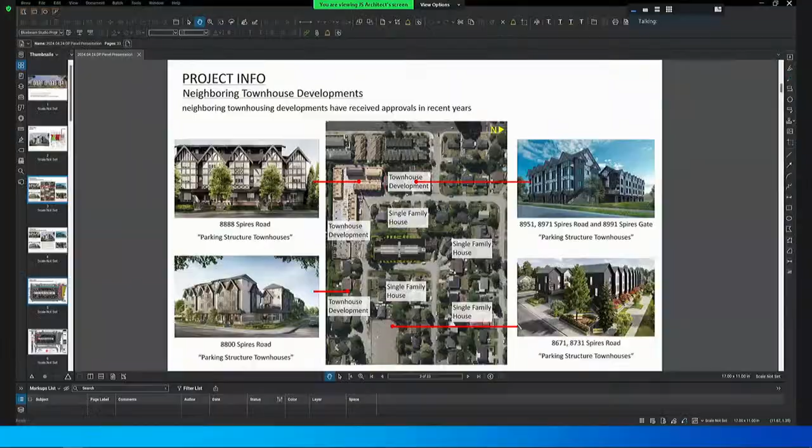Anybody from Topstream here? Yes, my name is Kobe, and our team includes Jeff, the architect, and Ewan, the landscape architect. Jeff and Ewan will do the presentation. Okay, can I start now? It's Jeff from JS Architect. Okay, are you going to share your screen with the drawings? Yes. Can you see my screen? Yes, thank you, okay.

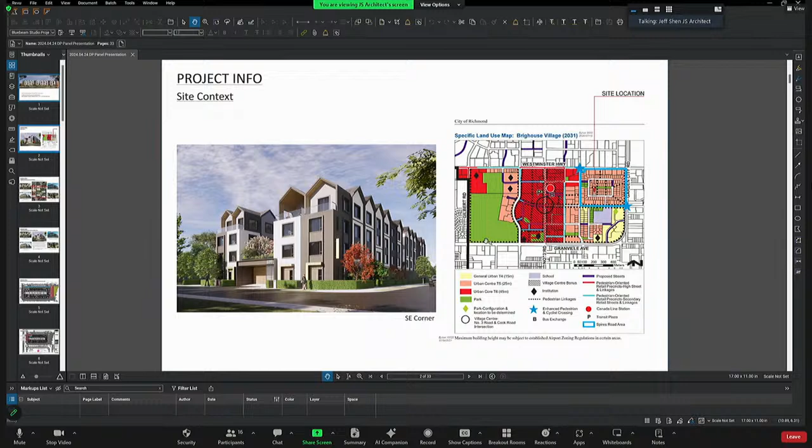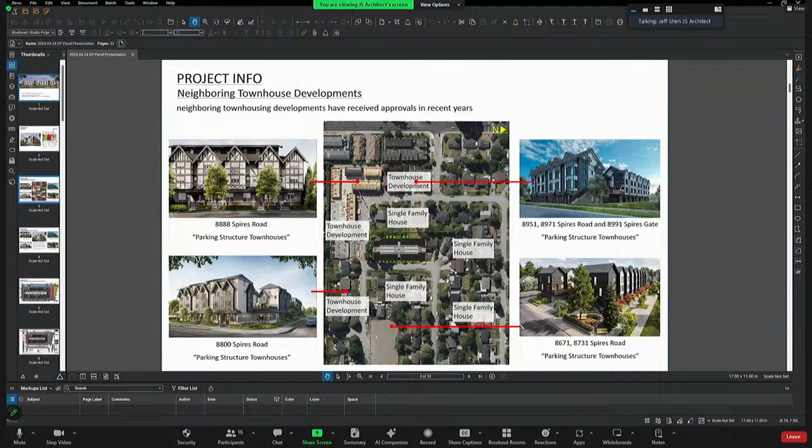Let me start from this first page. Thank you, panel members, for the opportunity to present this townhouse development. The proposed townhouse project is located at 8635 to 8695 Cook Crescent, the Spires Road area in the northeast portion of Brighouse Village in the city center. The subject site is assembled from 4 existing single house lots, bordered by single house and townhouse developments. There are multiple townhouse developments that have been completed or received approval in recent years. Looking at the surrounding townhouse developments, they are articulated in traditional or contemporary expression, or a style in between. There are many common features easily identified among them, such as gable roofs, similar scale of architectural forms, special treatment at ground level, and similar material and proportion across building segments. The proposed development gives a nod to its neighborhood and yet has its own unique character. We will explore it from the site context, floor plan functionality, building articulation, and landscape integration.

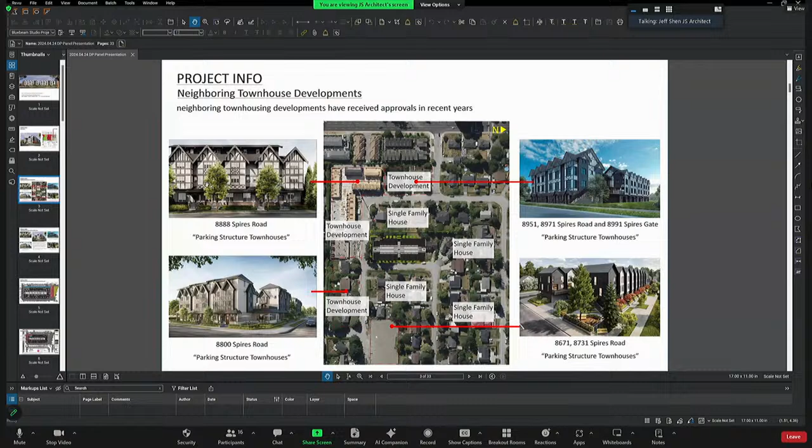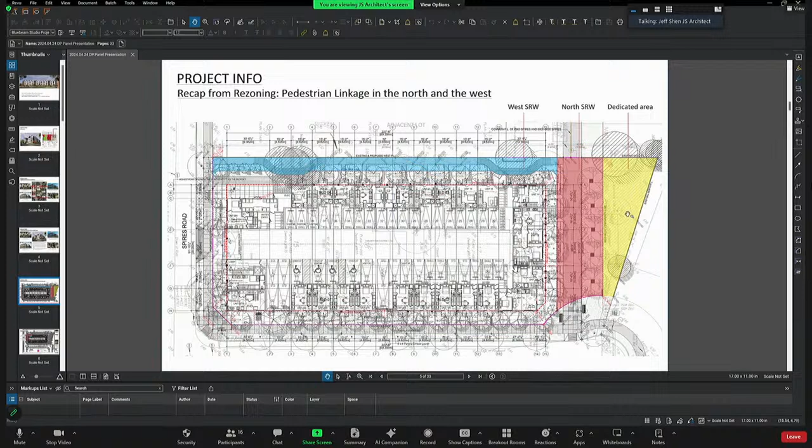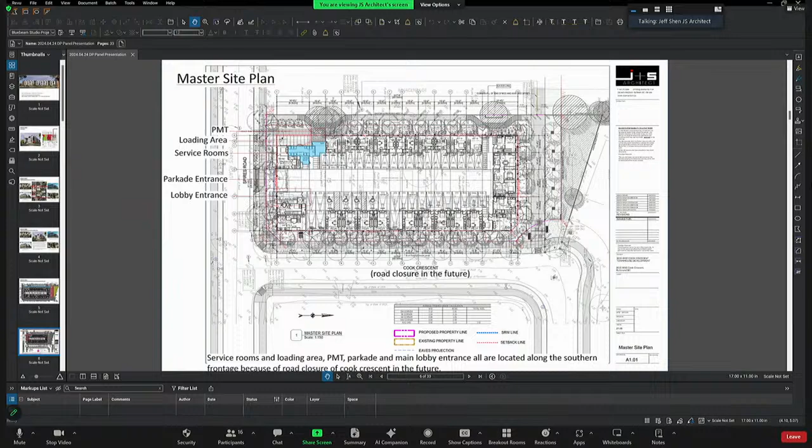The subject lot is defined by multiple rights-of-way on the north and west sides, and there's an odd triangle area to the north which the developer has dedicated to the city for future parkland use. In the city's future plan, the existing Cook Crescent will be closed and become a pedestrian connection to the northern city area. The only accessible road will be Spires Road, and all service facilities, parking, and the main entrance will be located at this very narrow street frontage. This challenge has been carefully studied and resolved by organizing different function areas strategically. The service area has been located at the west corner, visually screened off from the neighborhood property by existing and proposed landscape trees. The parking entrance is placed in the middle of the building with a large recessed area to allow sufficient traffic buffer to Spires Road. The main entrance lobby sits beside the recessed area with full height glazing facing west to monitor vehicle traffic within the residence site.

The development is comprised of a total of 28 suites with a wide variety of unit types from 2-bedroom to 5-bedroom. 50% of the units include a secondary suite for rental, with a total potential of 42 livable suites. The proposed development makes a diligent contribution by responding to the current nationwide housing crisis.

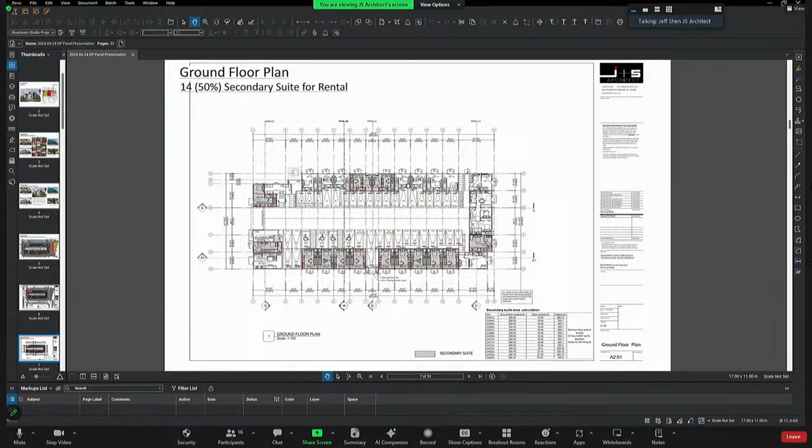As mentioned, the subject lot is surrounded by multiple right-of-ways along the north and west property lines. This area has been designed as landscape pedestrian connections. In addition, there are more than 3 meters landscape strip around the building perimeters to provide a second layer of green space, or allow for private patio amenity between the sidewalk and the individual unit entrance.

The live planted area are clearly identified in this page. It occupies 29.4% of the gross site area. Approximately 80% is located at the ground floor, and the rest of the green space are distributed at the parking roof and the podium level. Our landscape architect will provide more details introduction regarding the landscape design.

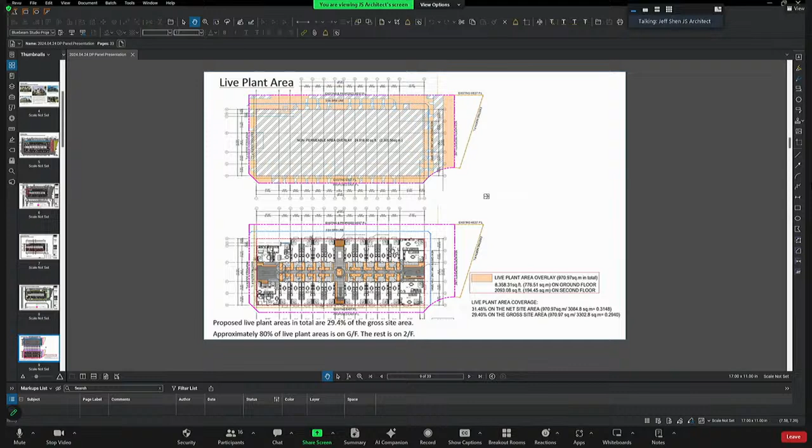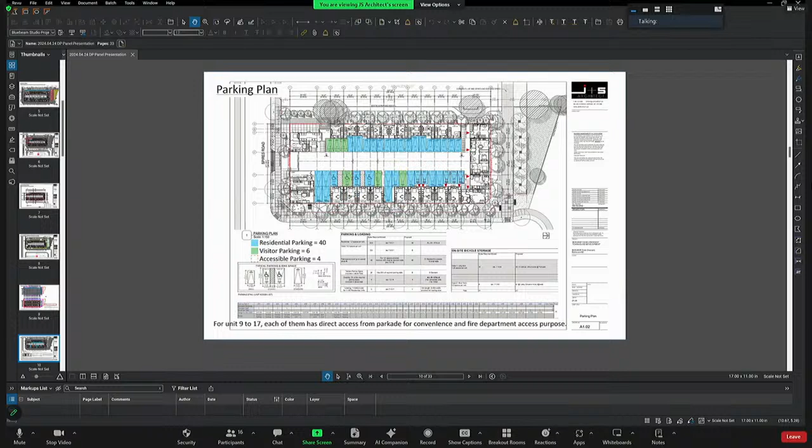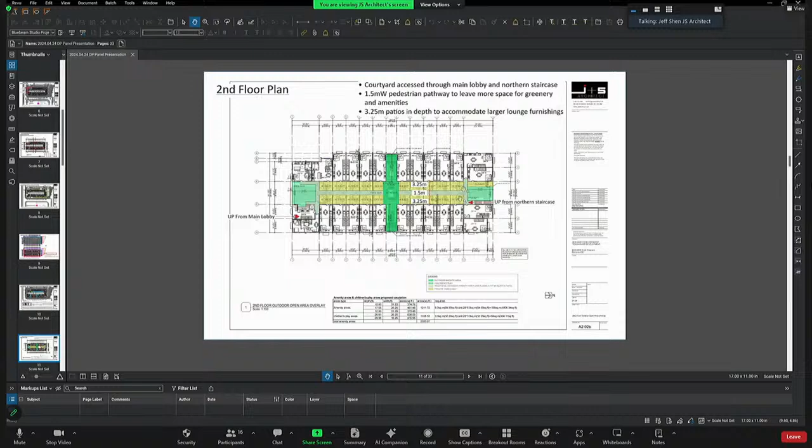The large courtyard is accessible through the main lobby and also from the north side staircase. Children play areas are located at the south and north ends with maximum sunlight exposure. Common amenity is in the middle. Over 3 meters private patio is provided to most of the units at this level. There is plenty of green space provided at each side of the building which can be shared by ground and upper-level units. And again, I will pass this opportunity to our landscape architect for detailed introduction.

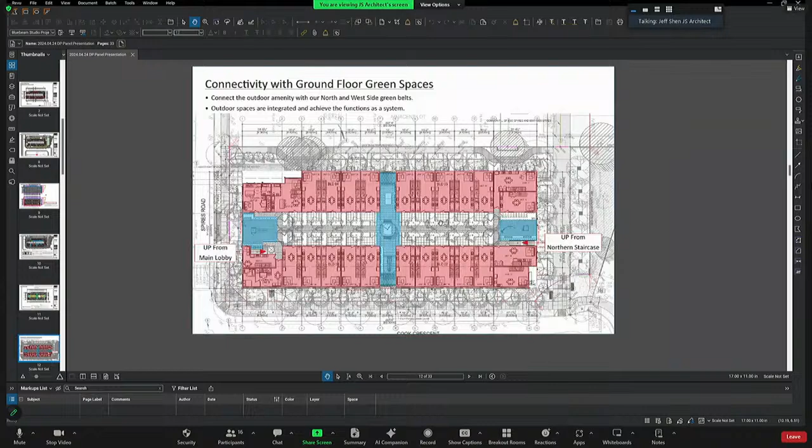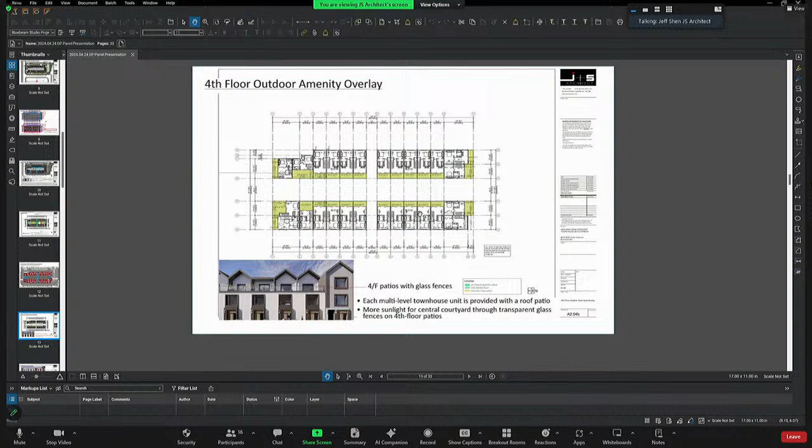The architectural expression focuses on a wide variety of materiality, texture, and color to create a vibrant streetscape. This concept is consistent at all building elevations, yet with some variances, by using different materials on the ground floor to visually reduce the height of the building and create a human scale entrance for each unit at ground level, breaking up building mass using high contrast materials.

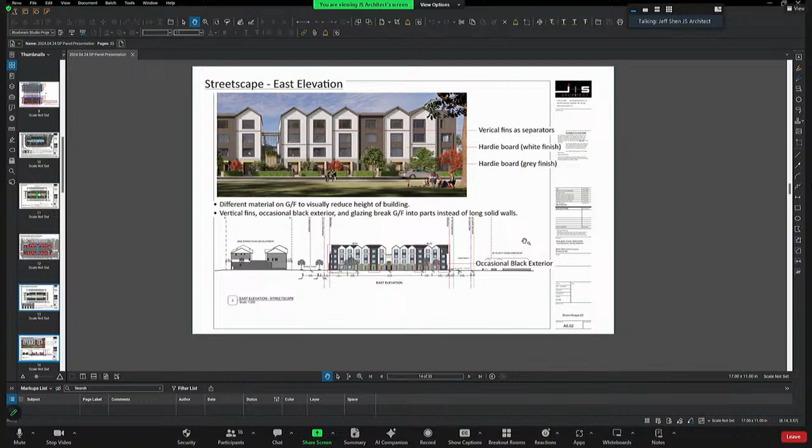The elevation presents a smaller scale to respect the cross street single house building style.

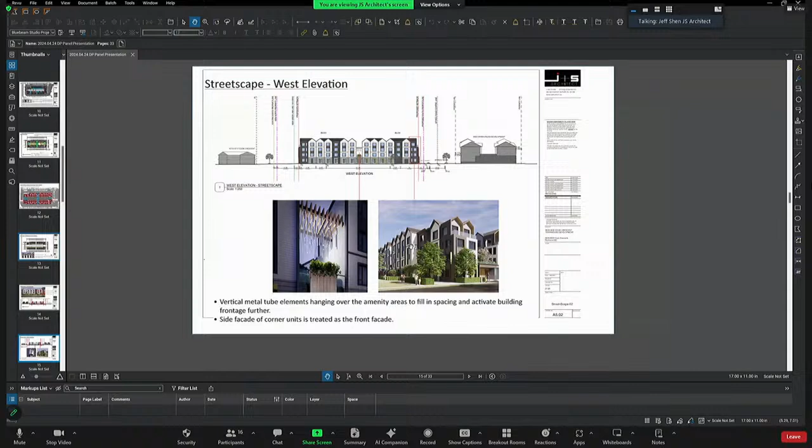Architectural articulation continues around the corner unit, using the same material and treatment to carry the front facade and treatment to the full elevation at the same street frontage. This page shows how each side of the building is treated as equally important, all having consistent visual interest.

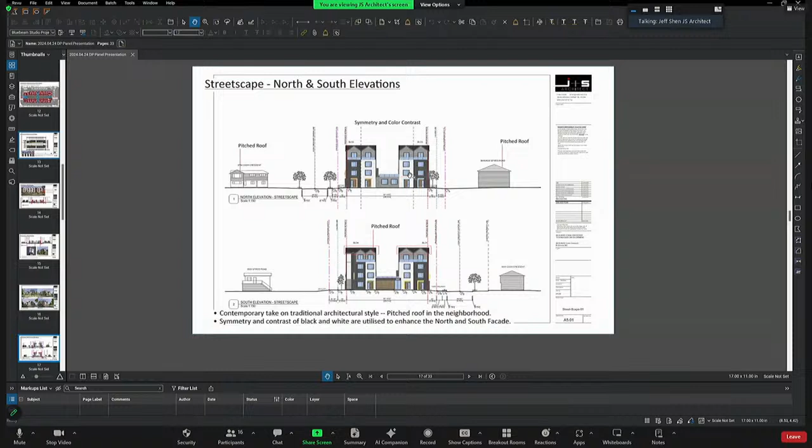Different colors of material have been selected to provide individuality to each block. 4 different colors have been assigned to 4 building blocks with different meanings. Yellow means sun, orange means land, blue represents water, and green is life. The design provides unique identity to each block and creates easy way-finding, iconic for residents as well as all visitors.

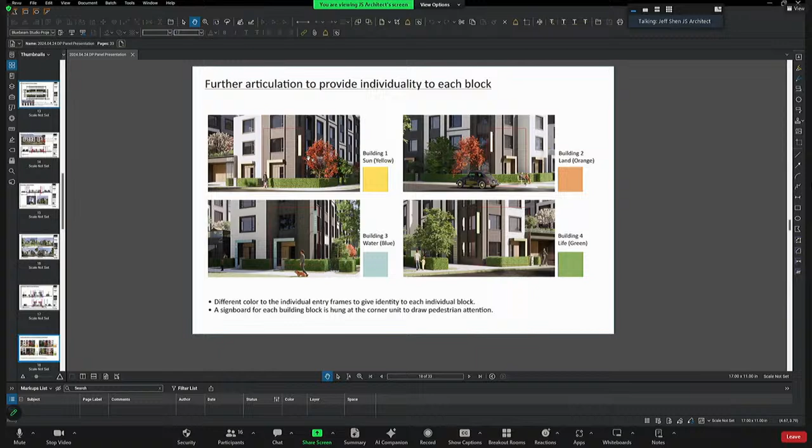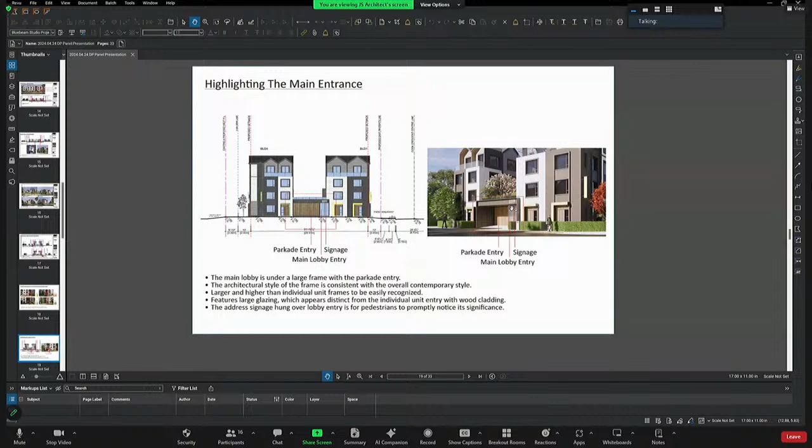Stable, secure, durable, and high-quality materials are selected for the project, including Hardie cement board, low-E glass, metal guardrail, and natural walnut panels.

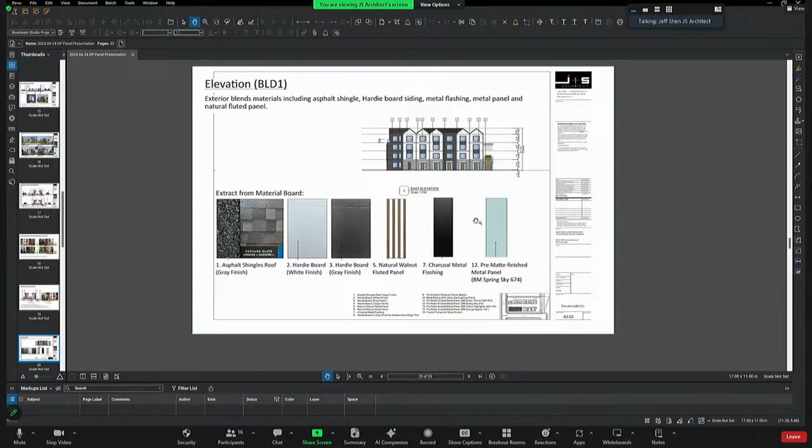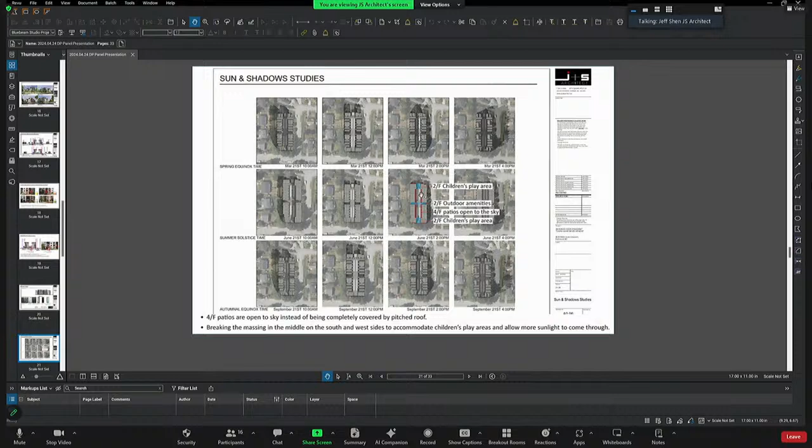This shadow study shows the proposed building has no negative shadow impact to neighbors, especially in summertime. And also we can see the children's playground area is exposed to the maximum sunlight direction.

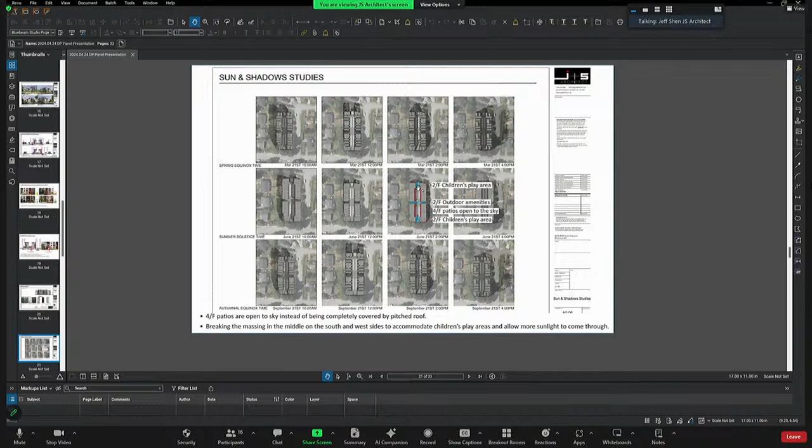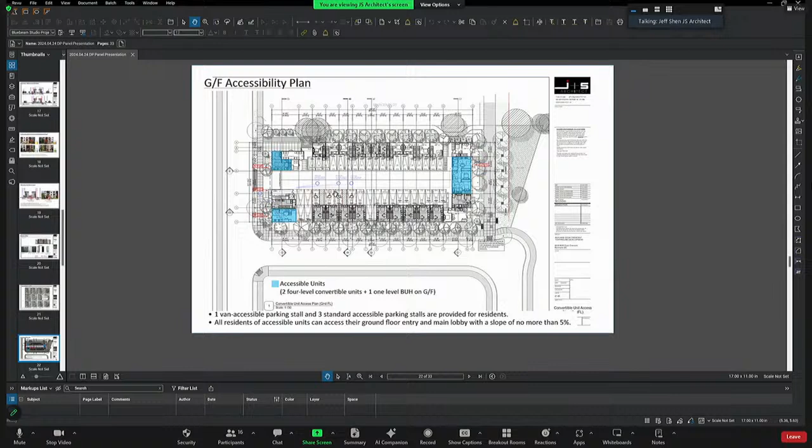Accessibility has also been prudently considered, including 3 convertible units, 1 van access stall, and 3 standard access parking stalls. Upper units can also be accessed from the elevator within the lobby area.

Regarding sustainable strategy, the proposed building will be in compliance with Building Energy Step Code, Step 4 target. And of course, we will be in compliance with the recently published BCBC Building Code 2024.

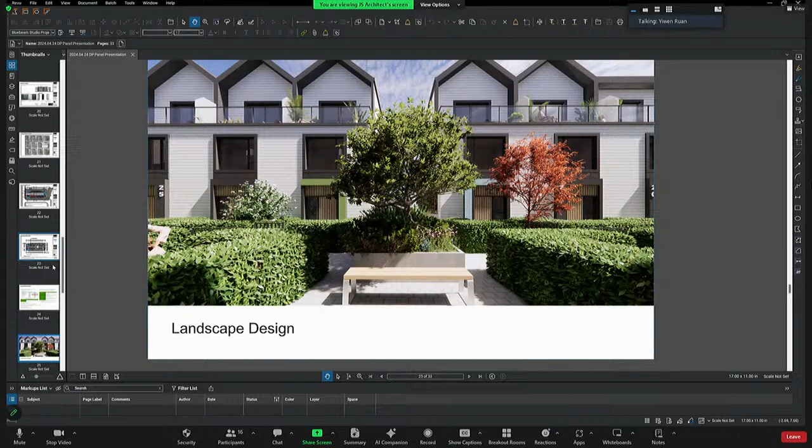So Yiwen, please. Thanks, Jeff. Hi everyone, my name is Yiwen from PMG Landscape Architects. I will give a brief introduction about the landscape. Can you go to the next page, please, Jeff?

Okay, so this is the overall ground floor landscape plan. Along the 4 edges, we are proposing a large landscape at the yard. Each unit yard will have a minimum of 1 canopy tree, which also enhances the walking experience around the site. We are trying to retain the existing trees along the west edge, the upper side of this plan; the pathway and associated landscape will be installed around the tree protection zones. Also along this edge, a solid fence is proposed to ensure site privacy.

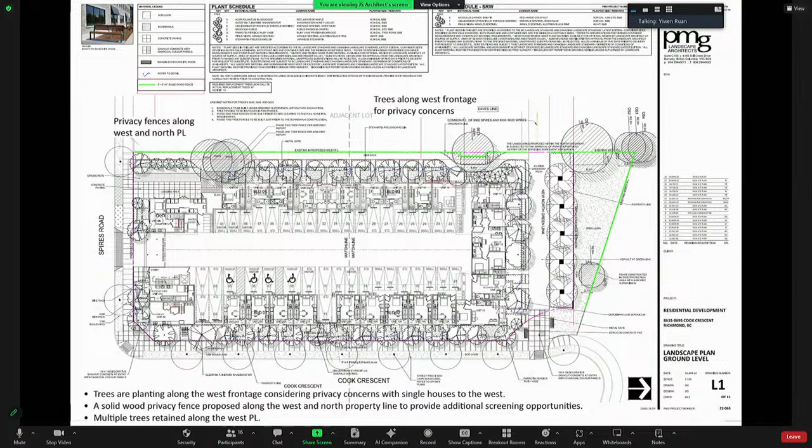Next page, please, Jeff. Yeah, okay, sorry.

We also have two open corner plazas at the northeast and southeast corners. Decorated pavers and furniture are proposed in these two plazas, offering people a place to gather and interact with each other. Next page, please.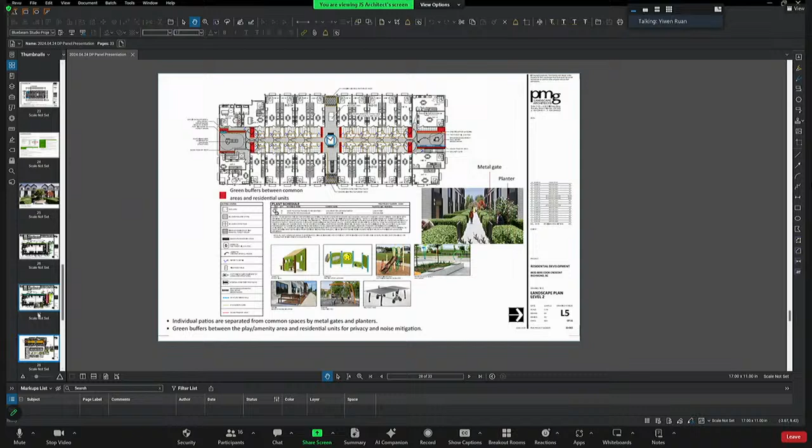On podium level overall, we are proposing more than 2,300 square feet of outdoor amenity area and more than 1,100 square feet of play areas, which is much more than required. Two playgrounds are proposed at the two ends.

The south playground is for kids age 5 to 12, and the north one is for kids age 2 to 5. A variety of play equipment is proposed, ensuring multiple kids can play at the same time. Seating is also provided around the playground for parents to look after the kids. In the center, outdoor fitness equipment and table tennis are proposed for adult use.

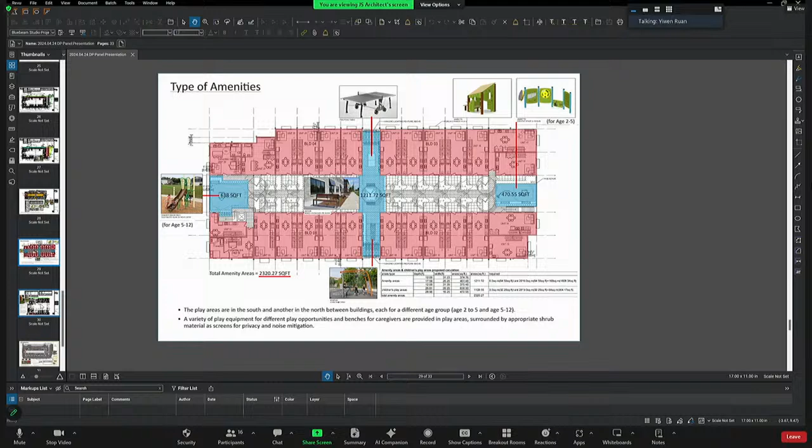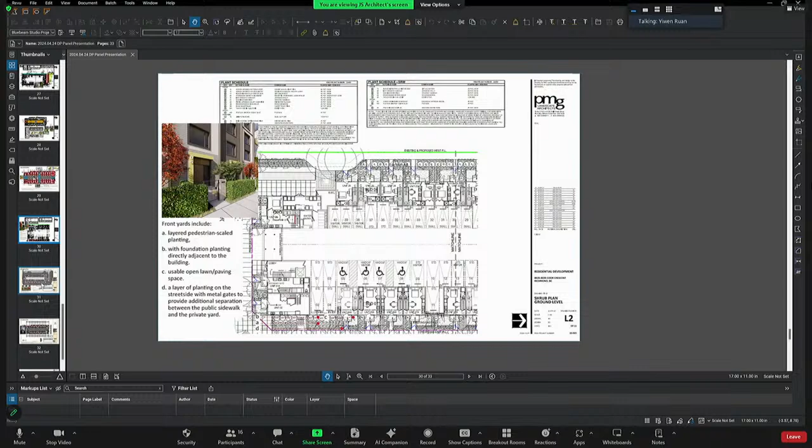Next page, please. In each yard, we have layered pedestrian-scaled planting and foundation planting adjacent to the building. Open lawn area or patio at each yard provides enough space for residents to have programs such as barbecue and table and chairs. Looking at this rendering on the left-hand side, we can see a hedge planting with a metal gate around this yard to ensure yard privacy.

Next page, please. For the lighting overall on the ground level, there are two types proposed. One is wall lighting integrated with the entry column, which not only lights the residence yard entry but also provides enough light for the pathways. The other type is recessed pot lights to light the front door for each unit.

Next page, please. At podium level, there are two architectural features with hanging LED light tubes at these two ends to light the outdoor amenity area. Next page, please.

So overall on the site, each tree we propose will have enough soil volume to ensure its health. The plant selections are primarily drought tolerant material, and we will also be providing high efficiency irrigation for all the planting areas. That's all the presentation for the landscape.

So Jeff, if you have anything you want to add for the presentation. Yeah, we'd like to answer any questions from the panel members. Thank you, we actually will have staff make some comments before giving the panel an opportunity to ask questions.

So, Mr. Craig. Thank you, Madam Chair. Just one point of clarification: the triangular area north of the pedestrian greenway that is being established is not intended to be park. That area is a future development lot. We do expect that there will be a license agreement entered into to allow the residents of this development to use that area until that redevelopment occurs, but it is not a city park.

Further to that, I would indicate that there is a servicing agreement associated with this project for site services and frontage works. I would like to commend the applicant on their efforts to integrate the 4 existing trees on the walkway along the western edge of the site. Happy to answer any questions.

Thank you, Mr. Craig. Maybe one point of clarification - the northern triangular piece of property, you said there will be possibly an agreement to allow residents to use it. Would it be on title or some other means to make sure that in the long term, if the adjacent site doesn't develop for a while, there's no confusion that this is not their property, just to avoid future conflict?

Through the chair, yes. The title of the property will be transferred to the city. The city anticipates entering into a license agreement to allow the residents of this strata to use that lot. That area will be fenced to prohibit public access.

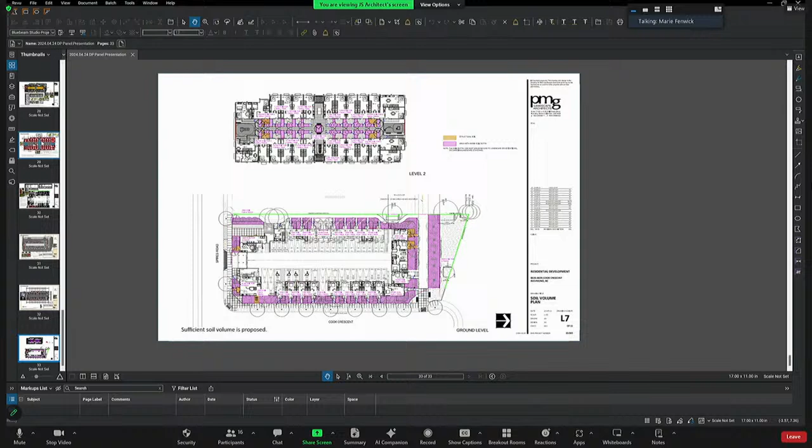Yeah, I had a question about the secondary suites. How big are those units and how many bedrooms? And where is the access relative to the access to the primary unit?

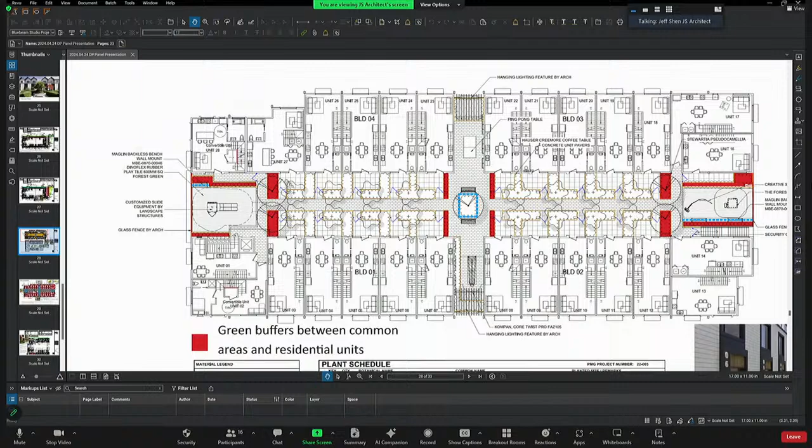Coby maybe can answer these questions. Okay, yeah, I can answer - the secondary suite can be accessed either from the ground level or from the upper levels. It's a little flexible for the big family member who can live in a different level of the suite.

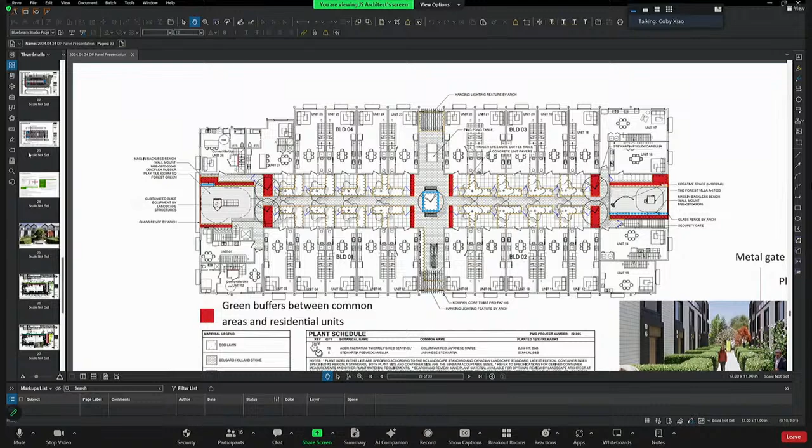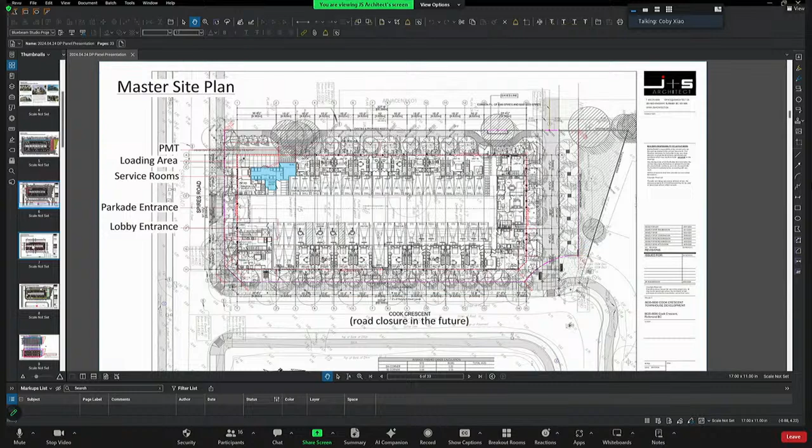If I can add to this, all the secondary suites are accessible from the ground level, from the street or from the right of way. We have indoor stairs connecting the secondary suite with the main suite, but when it's rented, the door between them will be locked. The size of our secondary suite is around 300 square foot, some larger, some closer to this number, and most will be a studio with just the kitchen and bedroom together. Thank you.

Okay. Michael, do you have any questions? You hear me fine? I didn't get a chance to check my mic. My apologies, do you have any questions or comments? Yeah, can you hear me? I'm asking that - yes, we can.

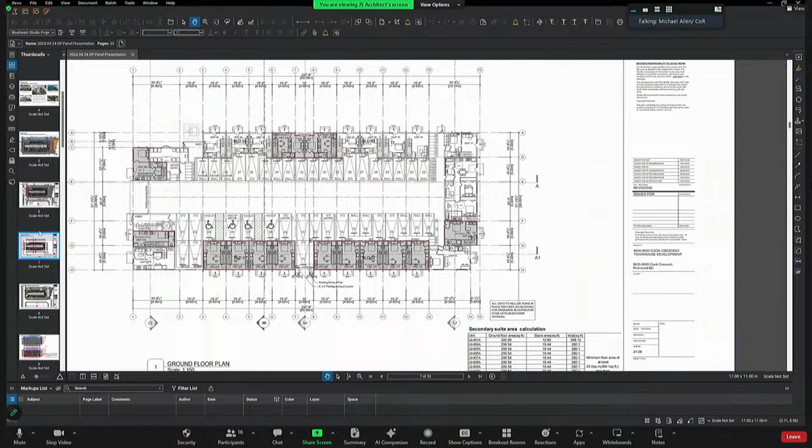Okay perfect, yeah, I was just going to ask you about the tree preservation. It seems like you've actually altered the plans to include the 4 trees to the west. If so, that's very commendable.

And then I just was wondering about the trees in the triangular part - I guess they're just on their own for now, and we'll see if they come out with respect to the license, is that true? Actually, in this triangle area, there's also several trees that need to be preserved, and according to our arborist report, the trees in this triangle and also the 4 trees on the west are all the trees to be preserved.

Okay, does that satisfy your question, Michael? Okay, I'll follow up with a couple of things first - I'm really pleased to hear that the number of bedrooms went from 2 to 5 bedroom types, so a good variety of size to accommodate families and smaller units for younger folks just starting out. I also like that it's matched with a good variety of amenities to meet the active play and passive needs of all ages and abilities.

My question is, you had shown that piece in between the gaps of the building where there's some sculptural pieces hanging down - is that part of public art contribution, or just a design element you've incorporated? No, it's not part of the art contribution, it's actually just our design, trying to make the project all connected between buildings and fill up the gaps. For the art contribution, we don't know what we will get for that yet.

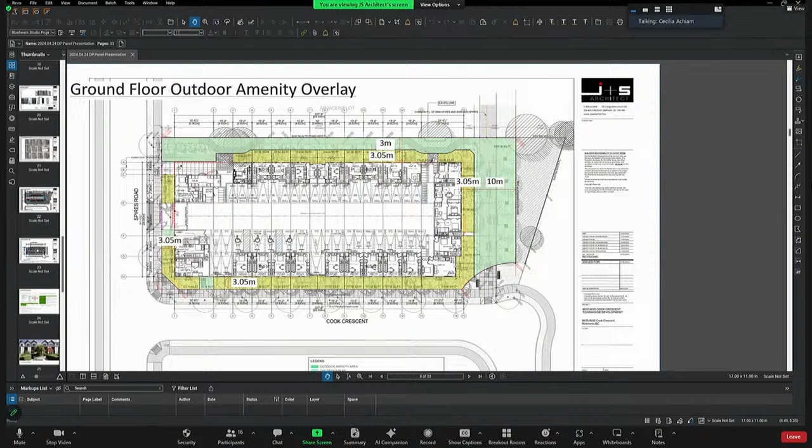The other thing is, I know most of my questions you've answered through your quite thorough presentation. Along the west side and the greenway, the lighting you've shown in the patio space - is that already sufficient for both of those areas to be lit, since they are quite far away from the actual buildings themselves?

For the landscape-wise, we have 2 types of lights. One is on the building, showing recessed pot lights from the porch. Another one is coming from the post - we have the post right on our property line area, shedding some light to the right of way. Okay great, thank you, I think you've answered my question.

So, Mr. Clerk, is there any letters or public in the chamber ready to speak to this project? Thank you, Madam Chair, we didn't receive any correspondence for this item. We have one member of the public in chambers, but she would need a translator to make her comments, and the translator is not yet in chambers. Not yet - are we expecting a translator?

She is expecting a translator, but the translator is not yet in chambers at this time. Okay, and there are no letters currently to be read?

Nothing, Madam Chair. Okay, I would say for the public individual in chamber, first of all, thank you for coming out to speak to the project. Unfortunately, we can't really hold up the proceedings to wait for your translator, and the city doesn't provide translation services.

So if the translator arrives before we finish deliberation on this project, I will make an exception to hear the presentation. Otherwise, if I could suggest doing so in writing and working with staff, if Mr. Craig could take that into advisement to actually have staff meet with the public individual maybe after the meeting.

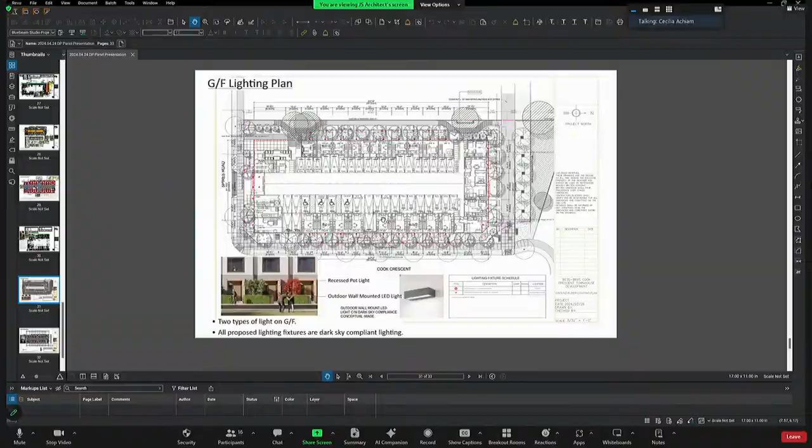Okay, so I guess I'll speak for us. This is a well thought out design. The form and character is quite modern, and as your presentation said, provides a nod to the existing surrounding area. So that's appreciated. A reminder that as the province comes down with new legislation, the interface to the west may look quite different when the future development comes in. But I think with the setback and it being an interface of a walkway, it buffers these new residences a little bit from that development as well. So I don't know whether you guys actually put thought into that ahead of time or whether it's happy coincidence, but either way, it's a good thing.

And so with that, I would like to note that staff has a positive recommendation on this site. And if I could have somebody move an approval for this site.

Move to approve. Okay, and I see Michael seconded. All those in favor? Okay, so thank you. And you have an approval, so you will be going to council as soon as you can. Thank you.

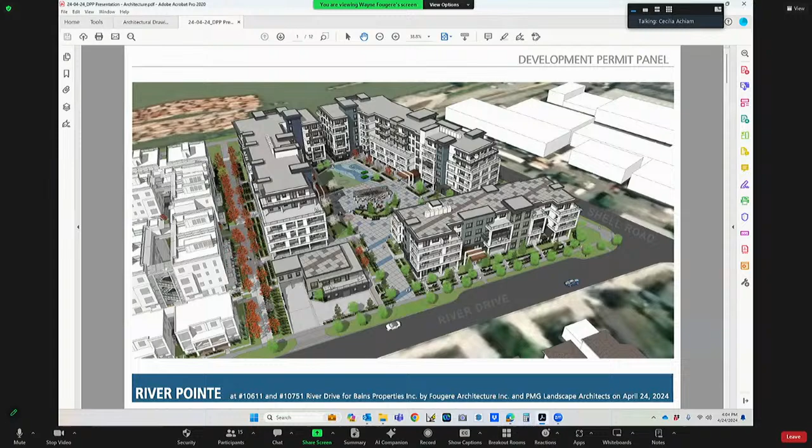Good afternoon. My name is Wayne Fougere. I'm the architect for this project. Ewan Ron, the project's landscape architect from PMG, will also be presenting. Rav Bains, John Chua, and Steve Jedrich from Bains Properties, as well as Sajna Jamaluddin from my office, are also present.

This project is located in the Bridgeport area plan on the northwest corner of the River Drive and Shell Road intersection. While the property wasn't officially part of the Park Riviera master plan that the city approved in 2012, it was contemplated by and illustrated in the master plan. Our River Pointe development completes the north side of River Drive between Number 4 and Shell Road in a manner generally consistent with the original plan.

Both PMG and my office designed the developments in phases 2, 3, and 4, and PMG also designed the Tate Riverfront Community Park. Our neighbors to the west are townhouses and stacked townhouses. Our eastern neighbors across Shell Road are industrial properties. There are single-family homes across River Drive to the south, and the Fraser River is immediately north of our development.

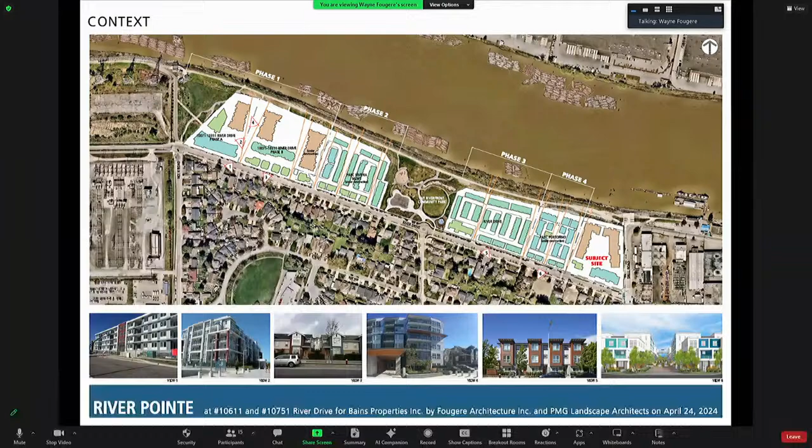The property is almost 2.5 acres in size. Our design follows the original master plan intention that envisioned lower building forms along River Drive, stepping up to larger apartment buildings closer to the river. The 2 buildings along River Drive are 2 and 4 stories high. The buildings behind step up to 6 stories.

There are 181 homes in 3 apartment buildings. Buildings 1 and 2 have 150 strata units. There are 31 homes in Building 3, including 13 market rental and 18 LEMR units.

The development is surrounded by streets and public walkways. The greenway along our west property line and the multi-use path along Shell Road provide access from River Drive to the dike. A generous space has been set aside at the corner, at the intersection of Shell Road and River Drive, for an art piece to mark the eastern end of River Drive.

Access to the underground garage is from River Drive. Visitor parking is located at the front of the underground garage, and a lift and stair connect the visitor parking to the podium and the buildings above. The residential parking is secured with overhead gates, and access is provided to the buildings above via elevators, as well

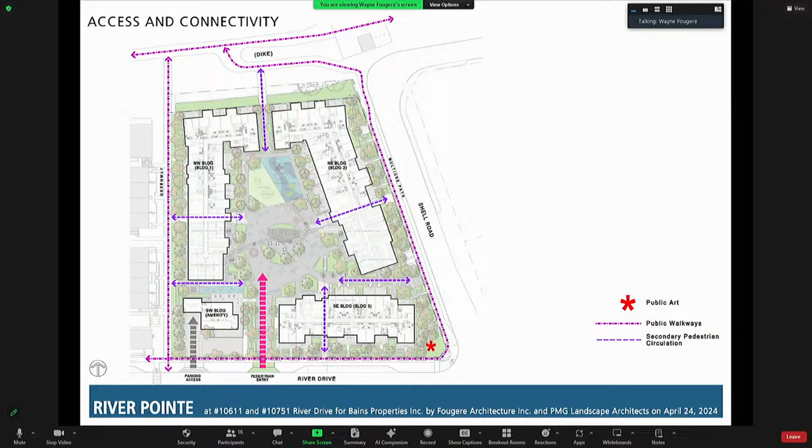as stairwells that connect to the central open space. The central walkway leads from River Drive up to the main square in the center of the site. The ground floor entries of each building can be accessed from the courtyard or from surrounding public sidewalks. The courtyard in the middle of this development also acts as a community space for residents.

In addition to the main courtyard entrances, all 3 apartment buildings have secondary entries. Building 3 has an entrance from River Drive sidewalk. Building 2 has an entrance from the Shell Road multi-use path. And Building 1 has an entrance from the greenway along our west property line.

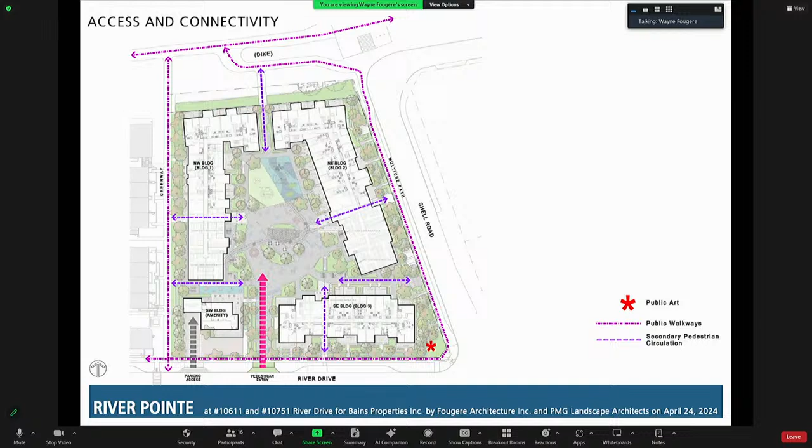In addition to the main pedestrian access to the courtyard from River Drive, there's also a minor east-west walkway through the site from the greenway to Shell Road, and a walkway from the courtyard to the dike.

To further strengthen the connection between the buildings and surrounding streets, street-facing apartment buildings have lower living areas and patios that are approximately 4 feet above the public sidewalk. Homes overlook the public sidewalk and the greenway and provide surveillance of the public space.

Landscaping and fencing provide a visual separation between the public and common realms to the private patios.

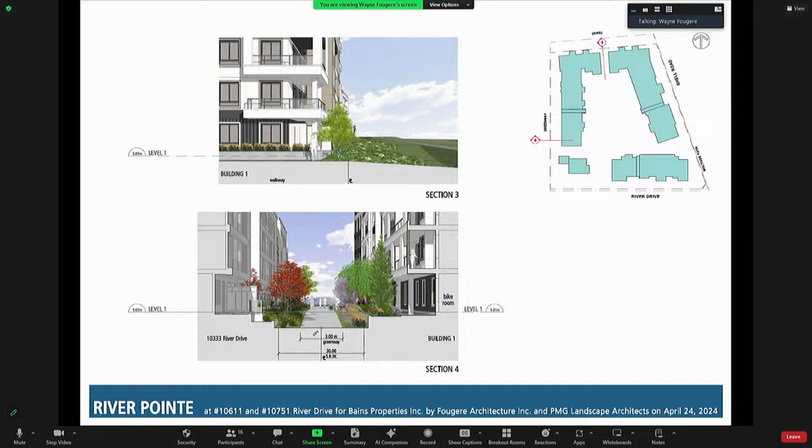The River Drive sidewalk, the Shell Road multi-use path, the greenway along the west side of our site, and the trail on top of the dike are accessible to people in wheelchairs, but the access from Shell Road to the dike will have a steep slope and therefore won't be accessible.

On-site accessible pathways provide access from and to the River Drive sidewalk, the amenity building, all 3 apartment buildings, and the central courtyard. There are 91 homes with basic universal housing features spread throughout all 3 buildings and on every floor level. These homes include studios, 1-bedroom, 2-bedroom, and 3-bedroom unit types.

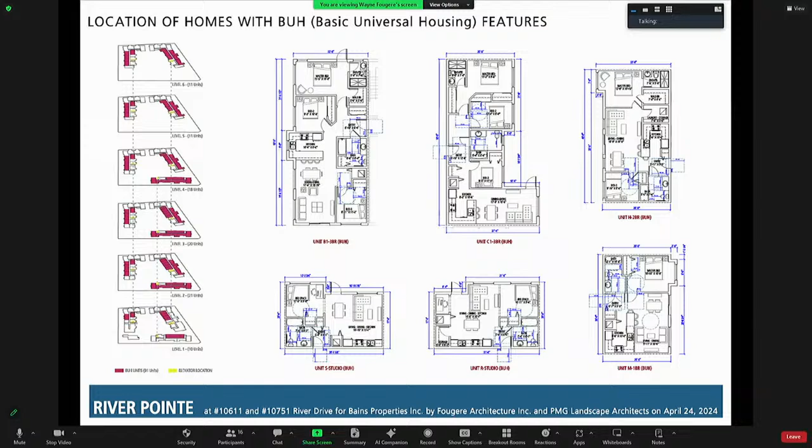The building design uses the same architectural language as the apartments in Phase 1 and the Park Portofino development currently under construction. We use frames and horizontal bands to structure and organize the building form. The main materials include Hardie panel, Hardie horizontal siding, and a Hardie version of board and batten siding.

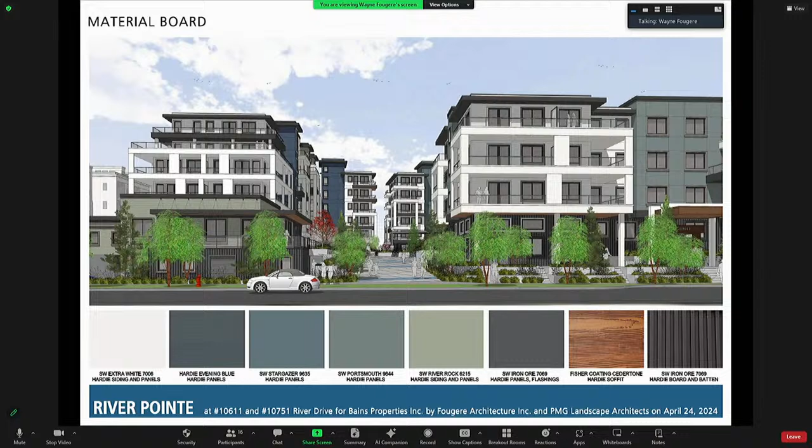The color selection is nature-inspired to connect with the surrounding environment, including the water and silt of the Fraser River and the green vegetation lining the banks of the river and the nearby Bridgeport Trail. The main body of the building is white, but it's balanced with color and material accents in blues, greens, and warm neutral tones.

Color and material are used to complement the building form. While white is the dominant color on most walls, the ground floor is clad in a Hardie board and batten siding with a warm dark gray stain. Blue and green Hardie panel clad walls are used on vertical portions of the building to help break up the massing and to add interest to the building.

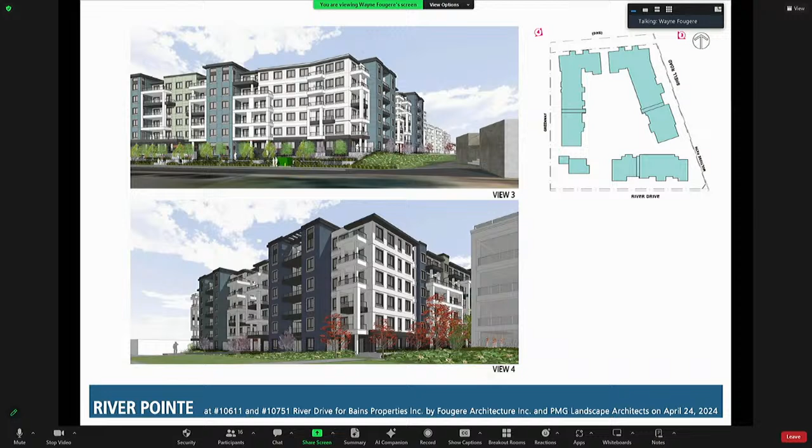We have a variety of indoor and outdoor common areas. The outdoor amenity space in the center of the site is a large trapezoidal courtyard that's more than a half acre in size with an average dimension of about 190 by 130 feet. The courtyard is easily accessed from all apartment buildings, as well as by the central walkway from River Drive and minor walkways from Shell Road, the Greenway, and the Dike.

The central open space features extensive landscaping along with seating and gathering areas, and provides both sunny and shaded areas to ensure usability throughout the year. Homes overlooking the courtyard provide passive surveillance of common spaces, especially the child's play area.

The amenity building is located on the southwest corner of the site. It features a large community room with a kitchen, bathroom, a small gym, and a guest suite. A balcony offers a sunlit outdoor space overlooking River Drive.

The amenity building's location, adjacent to both the courtyard and the street, as well as the integration of the lift from the visitor parking, ensures the indoor amenity is accessible by both residents and visitors. In addition to the amenity building, there are 2 smaller multi-purpose rooms in buildings 1 and 2.

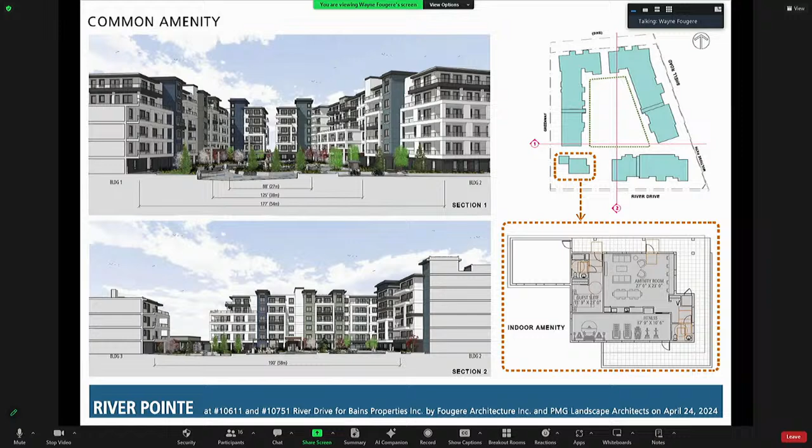Thanks, Wayne. Let me share my screen.

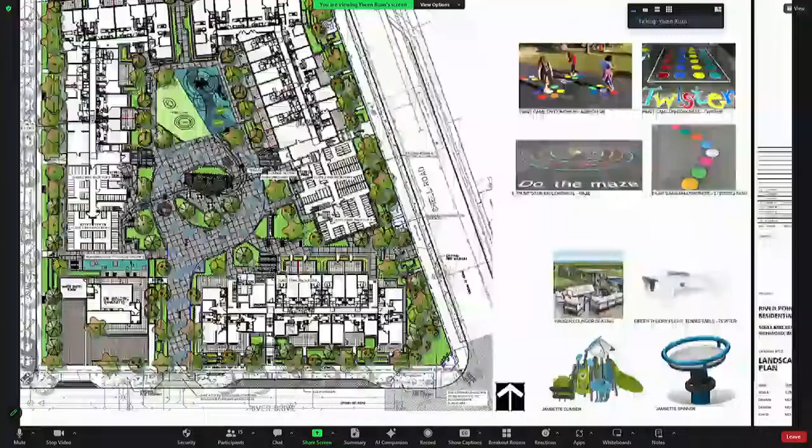The overall landscape design has been developed to concentrate on pedestrian connectivity and interaction. To achieve this goal, the ground plan has been developed to encourage a street-friendly presence, so that each unit at ground level or courtyard podium level will have its own front door and some usable outdoor area for furniture such as barbecue tables and chairs. This semi-private space is separated from the public street with a transition of a low decorated wall and a buffer of large landscaping consisting of canopy trees, evergreen shrubs, and plants.

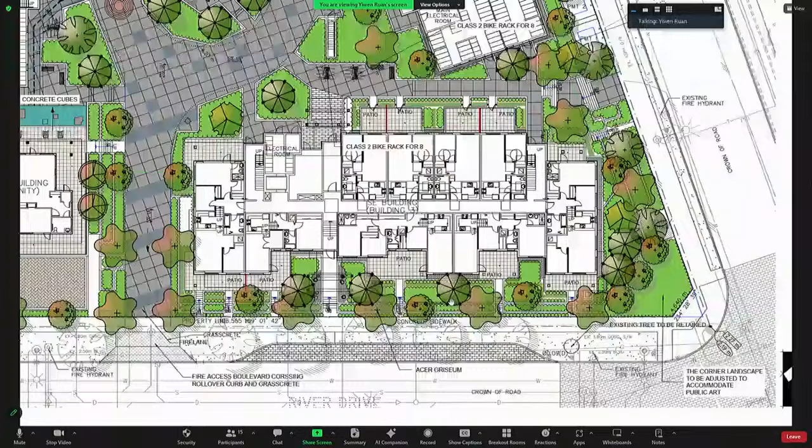Within the internal courtyard, all the building entrance lobbies have been opened up and integrated with furniture like benches or bike racks. We want this entrance to be prominent and inviting, so the seating areas allow friends and neighbors to meet up, or for a person to wait for their friends.

The biggest challenge we have in this courtyard is the fire truck access versus landscape area and people activities. We've been working very hard with the architect on this. Landscape is proposed as much as we can in this courtyard, excluding the necessary exit, the pathway, and the fire truck path.

Painted games are also added and proposed in this courtyard to add play value to this area when it is not used by the fire truck. Therefore, this courtyard has been reinforced as a people place where neighbors can interact and children can play on it.

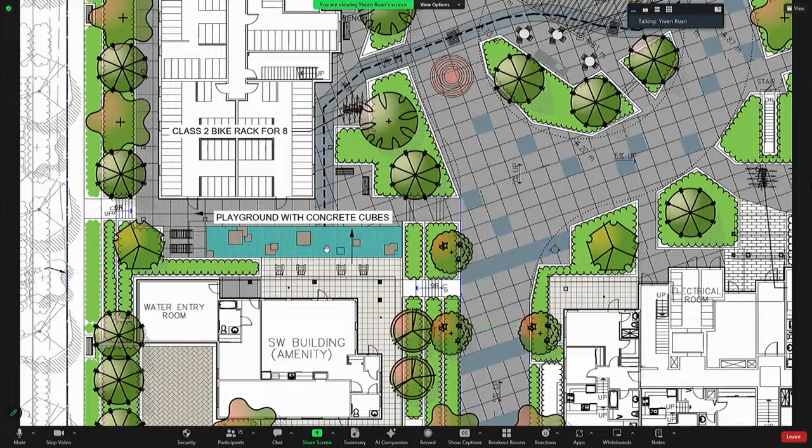There is also a variety of outdoor playground and outdoor programming which concentrates in 3 zones. At the south end, there's an open lawn area with mounds, playgrounds, and table tennis, which allows numerous kids to play at the same time. In the middle, we have a social interaction area with barbecue and lounge seating. Another zone is next to the indoor amenity area, where we're proposing play elements with some creative play features. These 3 programmed zones are connected by a tricycle pathway.

Overall, pedestrian walkways are provided around the site and within the site. We have 3 fully accessible pathways from south to north: one along the west edge, one through the courtyard, and one on the east edge. We also have another pathway from east to west going through the site.

Overall, the landscape plants are primarily drought tolerant with a focus on pollinators and birds. We will be providing high efficiency irrigation for all landscape beds. All the perimeter planting areas are at grade to allow a good volume of growing media and for trees to reach the natural water table underground. The pavers we propose in the courtyard are in a light color. So that's all for landscape.

Wayne, if you have anything to add. Okay, thank you, Yiwen. That concludes our presentation. We're here to answer any questions you might have.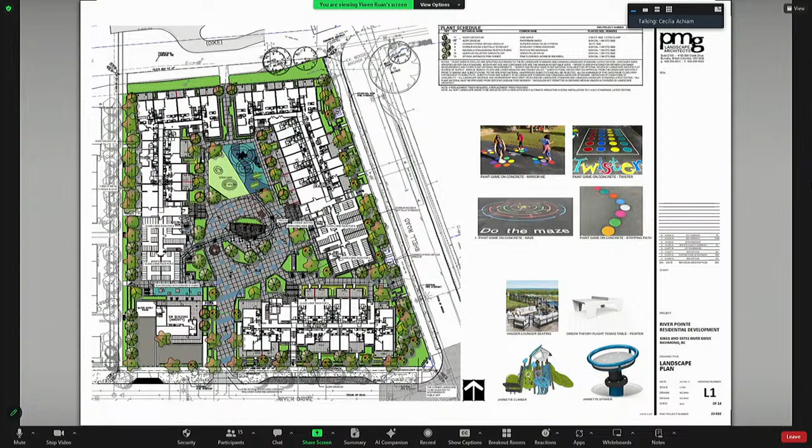Thank you. Actually, while we have this on the screen, can you please clarify one item for me? The central access, the fire truck access to the dike, is that also intended for public access too? I imagine to the east and west the perimeter walkways are for public access, but are you intending for the general public to be able to go through the site in the middle?

We wouldn't expect them to go through the site, but it's not gated. It's not locked, so people can meander, but it's really a semi-private area for residents and guests.

And I was also thinking, while it's wide enough for fire trucks to access, do you have anything built in to prevent people, for convenience purposes, using it as a driveway to load and unload, therefore creating a hazard for kids that are playing? Hopefully for everybody's sake, the fire truck doesn't visit very often.

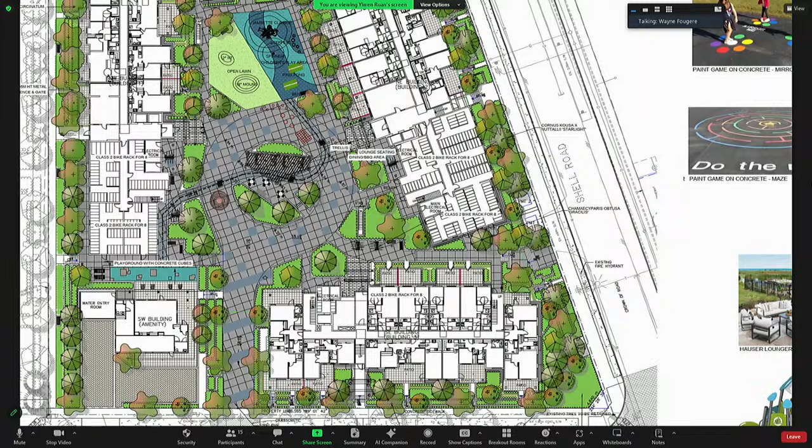So there's no intention to allow private vehicles. In the servicing agreement and in our drawings, we show a rollover curb and grass-crete paving in the boulevard, not a regular letdown, so it'll fade away. Plus, there'll be signage for no entrance other than emergency vehicles.

There will be, for those dropping off pizzas or whatever, time-limited parking in front of Building 3. And for any loading trucks, there's a loading area just south of the amenity building.

Okay, I appreciate that. I just think in the end you might need to make some adjustments. I hope people surprise me, but that's my prediction.

In the meantime, if staff, Mr. Craig, if you wouldn't mind making your comments.

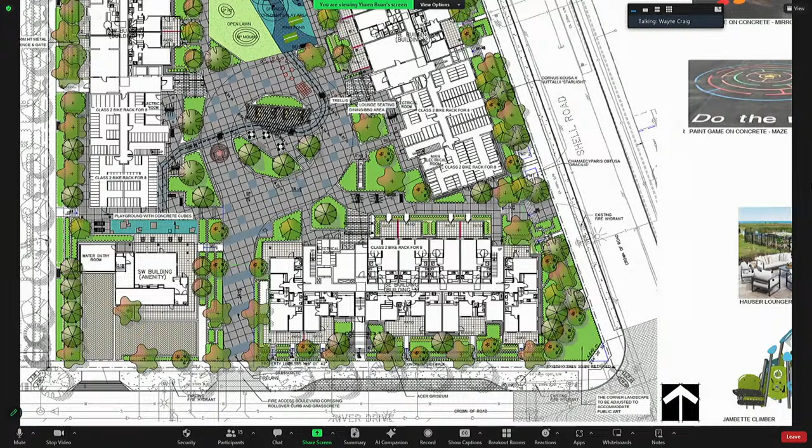Just a couple comments, Madam Chair. In terms of the rental building fronting River Drive, the rental units will be secured through housing agreements, and the developer has entered into a memorandum of understanding with a nonprofit organization for the management of those units. There is a servicing agreement for frontage works on River Drive and Shell Road and site services, and a separate servicing agreement underway for dike construction and dike pathways. The project also includes an extensive transportation demand management package, providing transit passes to 15% of the strata units, increased on-site bicycle storage, and a bicycle maintenance facility. I'd also point out the overall development achieves more than 70% of units as family-friendly, being 2-bedroom or larger.

Thank you, Wayne. Other panel members, Marie and Michael, questions? I have a couple questions. I was wondering about the LEMR units—you mentioned they're in one building. I wanted to confirm whether all the LEMR units are specifically in that one southeast building. The other question I had was about the aging in place features I noticed—could you describe them a bit and mention how extensive they are?

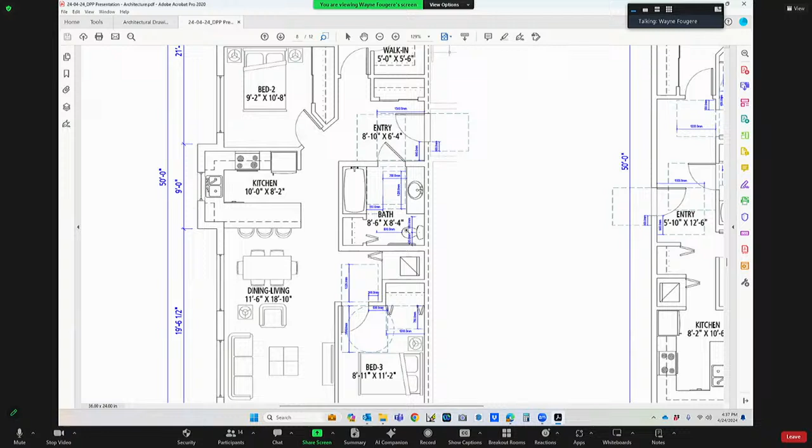As for the location, I'm going to share my screen again, just one second. You want to look at unit plans - you can see that these basic universal housing units have dimensional features in the rooms showing the type of space required by basic universal housing, in front of doorways, toilets, sinks, and tubs.

Mr. Fougere, thank you for that, but I was more meaning the driveway location - I believe that was one of the questions. Just wondering. And that is here - this parking access is right here at the edge of the site, the western edge of the site.

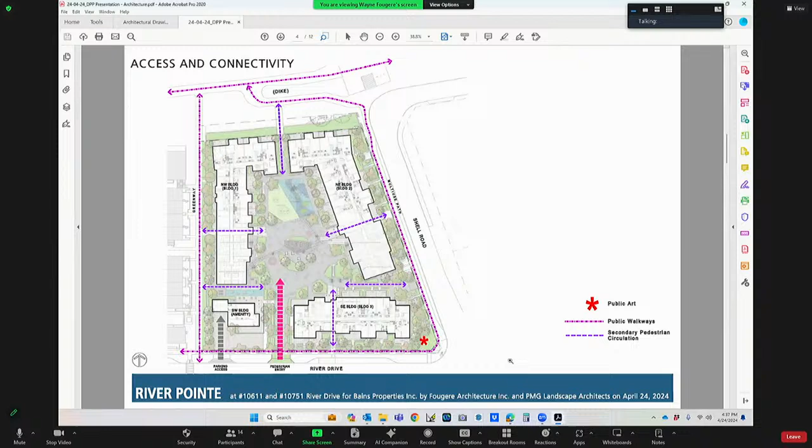Mr. Craig, if you could take on the traffic impact assessment question, or one of the staff members. Sure, thank you Madam Chair. I think there was one additional question before I get into the traffic, and that was, how does the city ensure that the rental units and the affordable units are used for rental purposes?

The city will be registering a housing agreement on title of the property. The housing agreements come with the obligation to provide statutory declarations to the city on a periodic basis to ensure those units are rented, and that the affordable units are rented by tenants who qualify for the affordable housing strategy. In terms of the traffic impact assessment at the rezoning stage, this development was reviewed by the city's transportation department as well as an independent third party, and that is how that statement was arrived at.

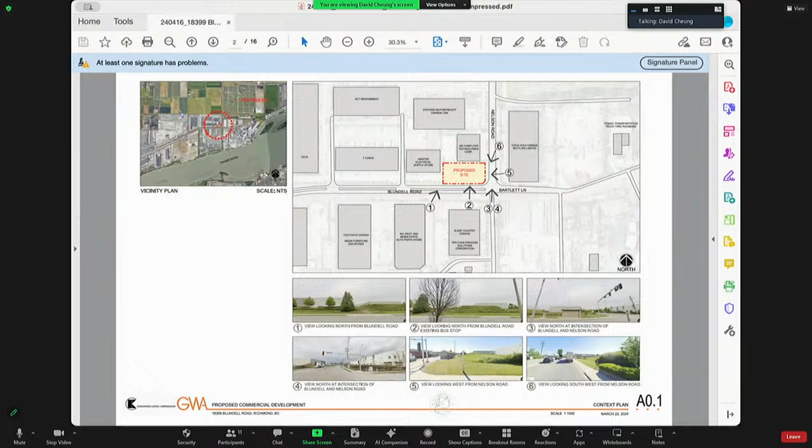Our project is located in East Richmond in the Fraserlands industrial area. The site, for the most part, is surrounded by very large industrial storage warehouses for the likes of Purolator, Coca-Cola, Sleep Country Canada, etc. And to the east, we have the Lafarge concrete plant.

Some background: a development permit was actually obtained about 3 years ago, but through a series of unfortunate events, it never got built, and hence why we're back here today to reintroduce the project. I'd like to say that the area itself is owned by the Segal family, and most of you may have already heard about Joe Segal. He was the Order of BC recipient, a philanthropist, and a mentor.

But he passed away about 3 years ago and left behind quite a legacy. He owned actually just under 1 million square feet of all the lands in this area, and he had always imagined that this last parcel of land could be used for a service. But in his untimely passing away, he was 96, and his wife also passed away last year, which was very unfortunate as well, so there were some delays there.

As well, the former owner's representative project manager had also retired, and the original design of the project, done by CTA Design, had also changed ownership. So the new owner's representative, who works a lot with Gustavson Wylie, asked if I would be interested in taking over this project, and hence why I'm here today.

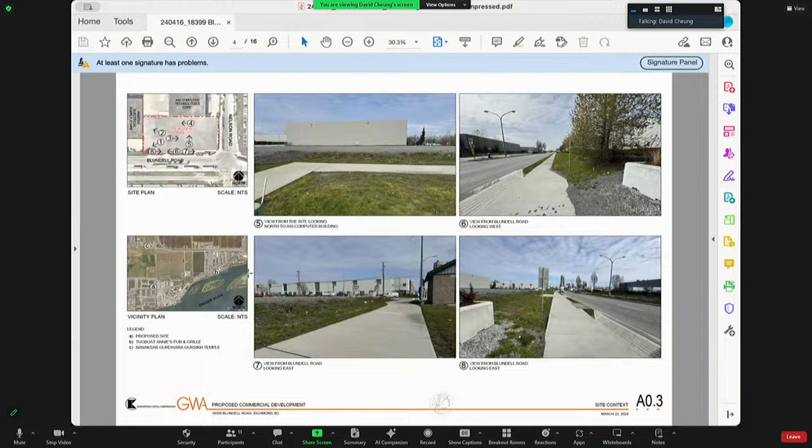So as I mentioned before, our access along Nelson is right in and right out, but we do have an access point along Blundell that you can turn left over to. What we're proposing is 2 facing buildings with a central courtyard. The buildings themselves are about just over 8,000 square feet, and the central courtyard is about 1,000 square feet. They are intended to be for restaurant use, with 2 of them available for drive-throughs, and the other remaining 3 could be typical inline quick service restaurant types.

The project obviously has its own screened garbage enclosures. We have loading bays. Overall, we have about 64 parking stalls, 9 of which will be dedicated for electrical charging vehicles, and we also have 2 accessible parking stalls near the front entries.

The site and the area has been designed for accessibility, so the pathways from the accessible stalls to the front entries for all the restaurants and the drive-through restaurants will be within the building code parameters. We also have bicycle parking to the City of Richmond's bylaw requirements, as well as loading. Our drive-through itself will be able to accommodate a minimum of 8 queuing, but we have 9 here, and we also have a double queuing here for 13 cars.

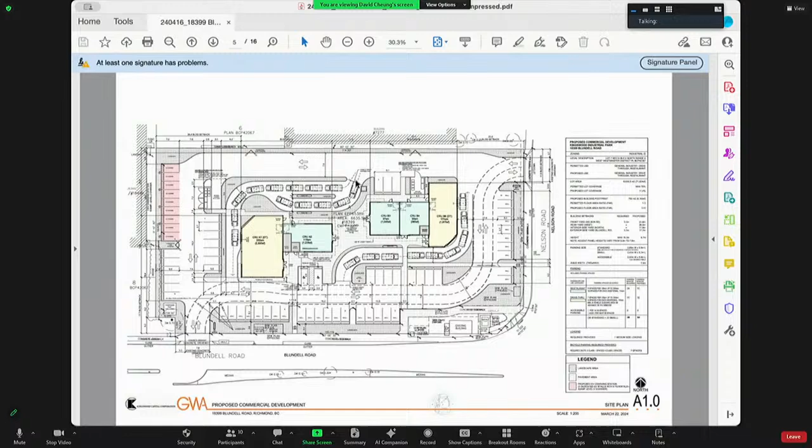For the form and character, the project is 1 story. This is just the floor plans. So this is building A. It's 1 story, and it's approximately 20 feet, or 5.9 meters, high.

The form is articulated with differing parapet heights and extended canopies. The parapets are designed so the rooftop units on the roof can be screened when viewing from below.

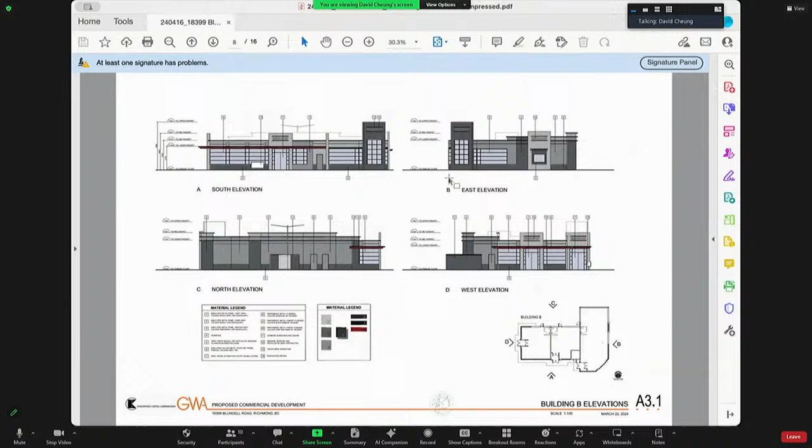We have a series of renderings that show what the form and character of the building will look like. From the original design in the first development permit, the building was proposed to be tilt-up concrete, but because of the sustainability requirements we're now faced with, we've decided to go with an insulated metal panel system. We'll also have glazing, tinted glazing, aluminum storefronts, and extended canopies that provide weather protection and access to the front door.

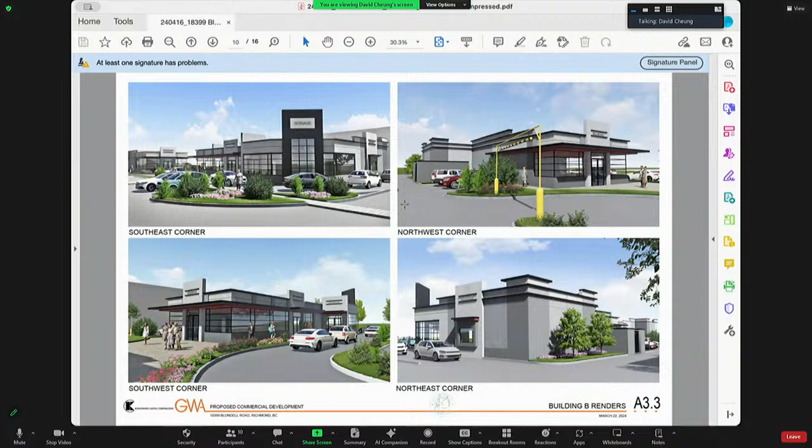The project itself, from the context photos you'd seen before, we're trying to create a sense of a service oasis, because it's quite a bleak environment when you look at the buildings surrounding it - just blank, tilt-up concrete walls. So we're trying to provide some contrasting colors, particularly this red band underneath the canopies, just to make it a little more interesting.

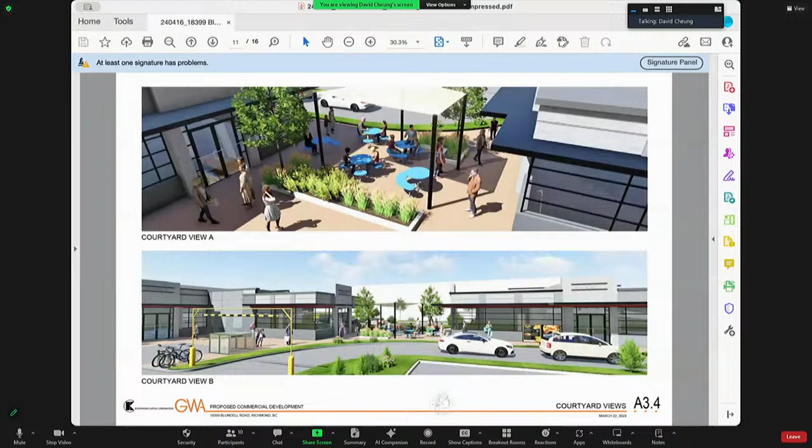And also we have this central courtyard with an awning feature, like umbrellas, which we believe will animate the space and create a nice area for the community to go to. So with that, I'll stop my presentation and let Christy go over the landscaping portion.

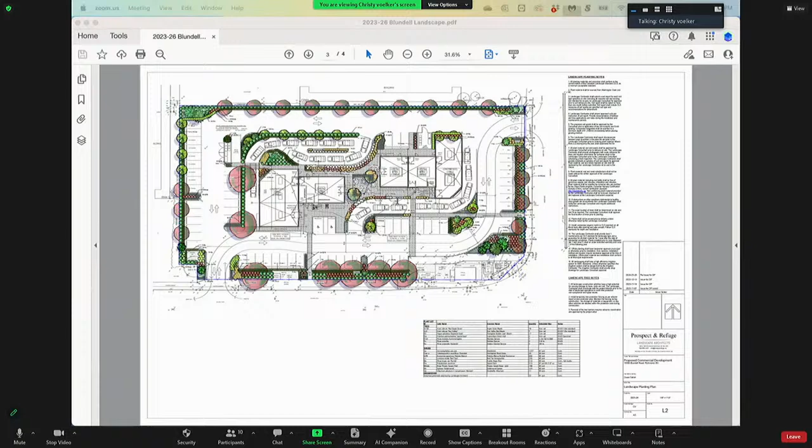Thank you, Madam Chair. Just a few brief comments. The drive-through for this site will include automated voice control systems to adjust speaker volume to ensure compliance with the city's noise bylaw. The project does include the provision of 9 EV charging stations, and there was a servicing agreement entered into as part of the previous development permit panel or development permit approval for frontage works, and those frontage works have been completed.